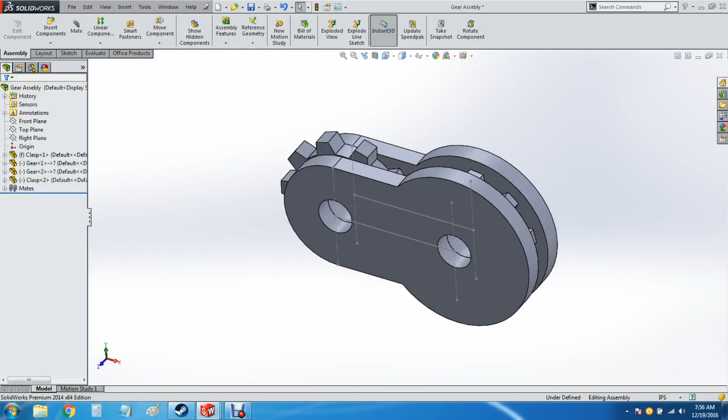Today I'm going to be showing you how to make a drawing in Solidworks as well as a bill of materials. So I'm going to pull up my recent project, one of the fidget toys. It's a couple of gears inside of a clasp. One moment while I work on that. Alright, as you can see, this is my assembly. We've got two components in terms of the two drawing files that have been put together, so I've got the outside clasp as well as two inside gears that rotate against each other.

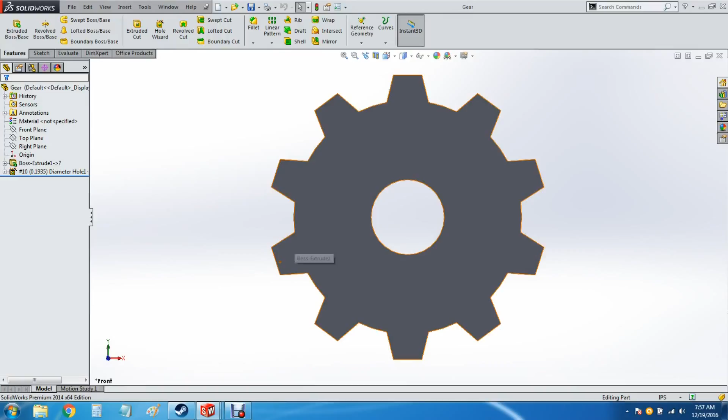Let me go ahead and just put this in. What we have here, this is the gear, and that's the clasp. So I'm going to show you guys how to make a drawing from the assembly, and then we'll make a drawing from the part file.

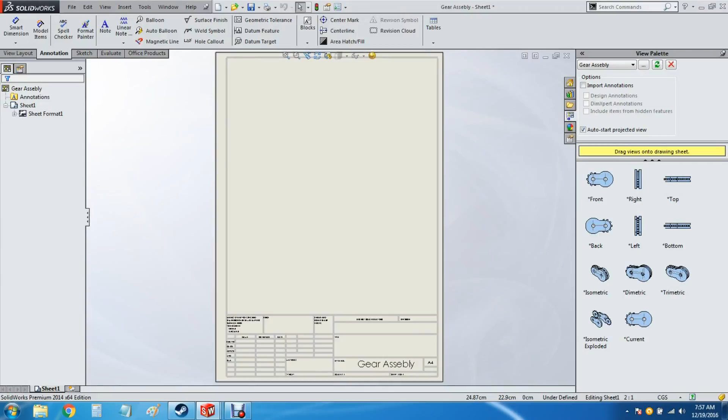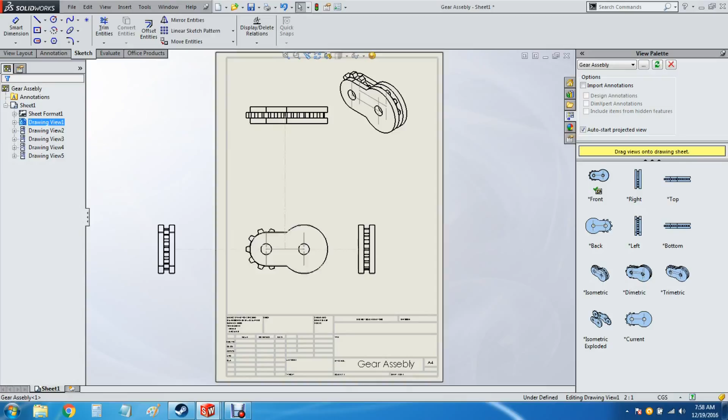So you'll hit File, New, or Make Drawing from Assembly. Do a metric drawing since all my parts are in metric, as my printer prints metrically. You'll push this to pin it down. We want to do the front, I think that'll be the top, and the bottom look the same, so we'll do a left or right. We'll actually have to do both since they look a little bit different, as well as an isometric part. And you'll just hit the check mark and you're good to go.

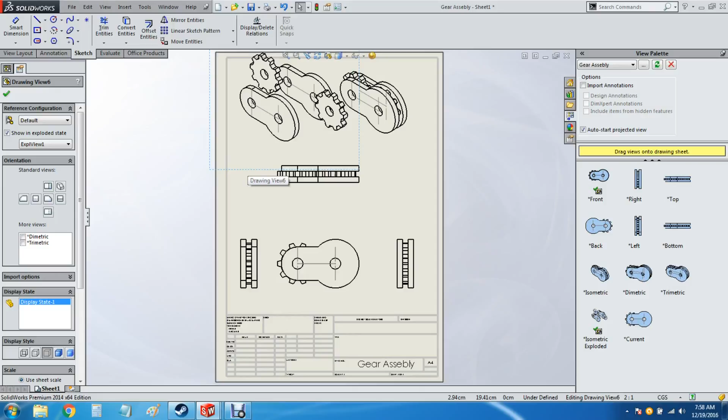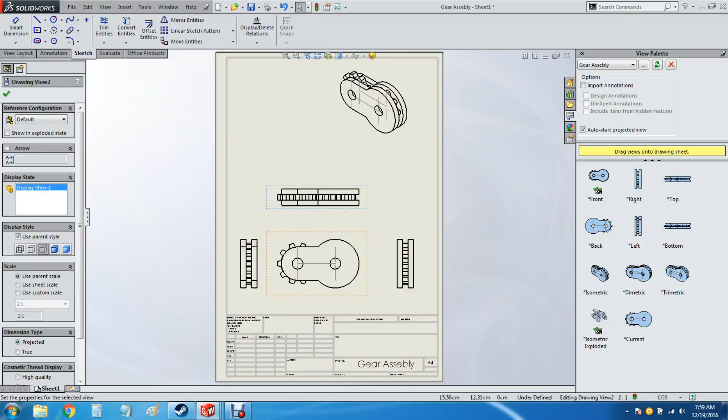So let's go ahead and just kind of put these things so they fit well into my paper. And I also have an isometric exploded view right there. Let's see if I can move that down a bit. Well, it doesn't appear so, so maybe I'll do the isometric view in another drawing. So I'm just going to delete that. Fantastic.

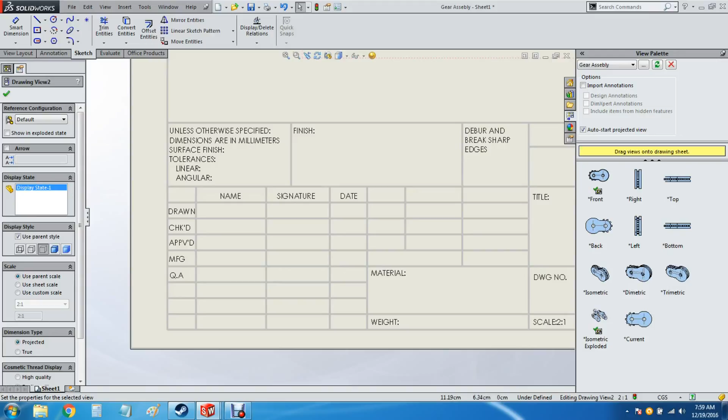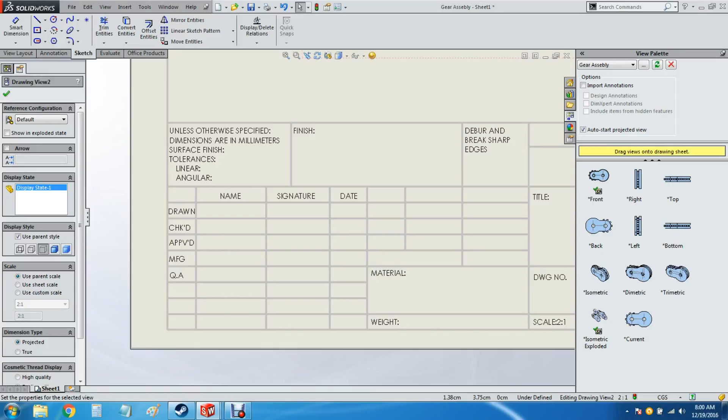The weight, which can be calculated in a different system, and I'll probably make a video about that later. The finish would be, there is no finish. This says deburr and break sharp edges. That really applies to when you're doing CNC machining on metal. Metal can be very sharp, and this would say to make it less so.

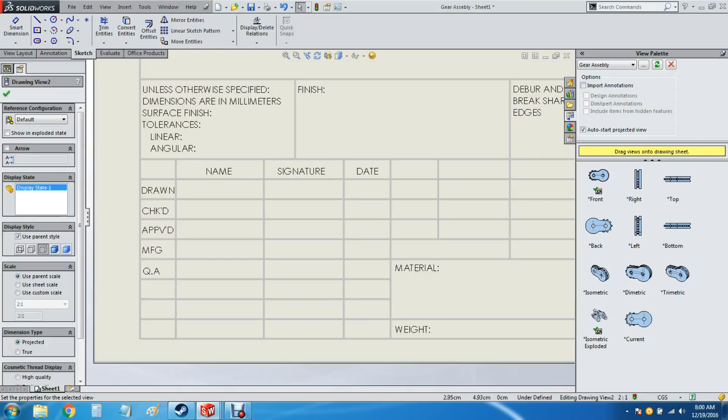And then you've got, if you were doing construction work as an engineer, you'd probably know this: the drawn would be by whoever drew it, whoever checked it, approved it, and the quality assurance I assume. I do not recall what MFG stands for, probably because I'm not in engineering courses.

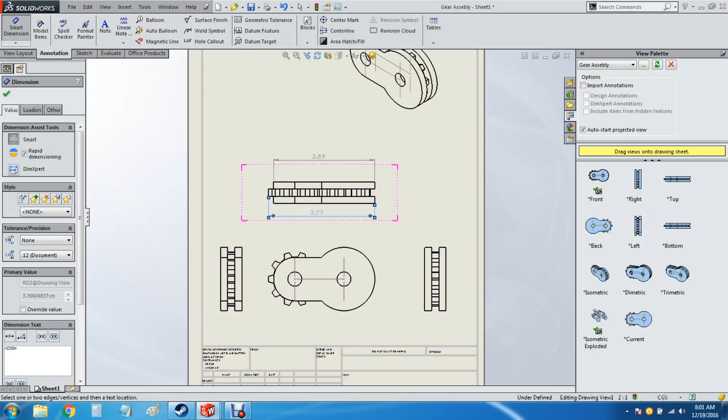And then it says, unless otherwise specified, dimensions are in millimeters. I'm going to change this to centimeters because everything that I draw is in centimeters. Tolerances are how exact it has to be, so you can be like plus or minus 2 or 3 millimeters, meaning there's a bit of wiggle room, which obviously you wouldn't want on something like an artificial heart, but on these things it's okay.

So in a drawing you want to have the dimensions laid out. We're going to hit annotation, smart dimension, and we're just going to dimension a couple of different things.

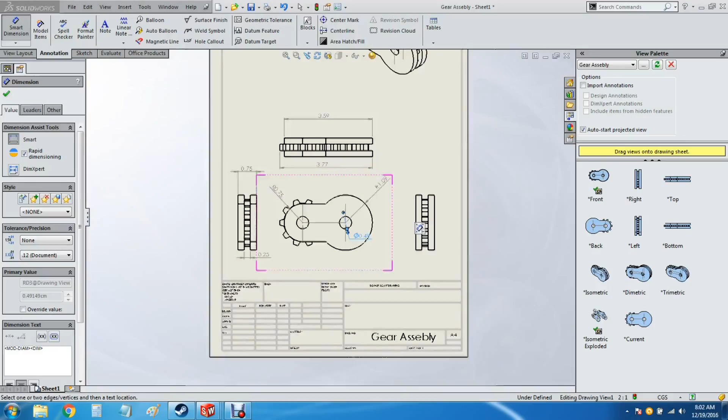So we'll do the dimension of a clasp, the overall length from one end to the other. We'll do the width of the fidgeting toy from one edge to the other on the side.

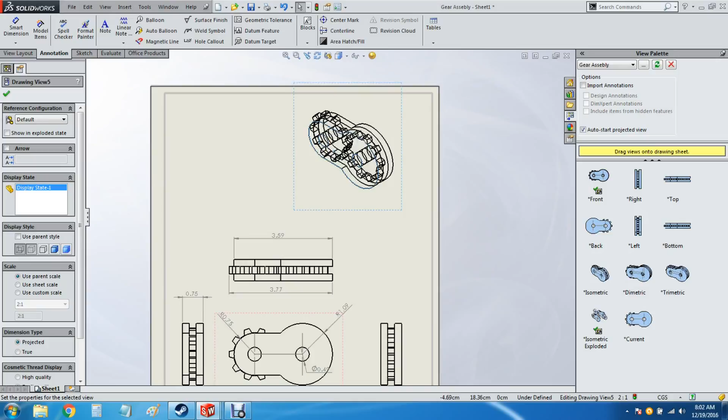You can also, if you want, do the inside dimensions. Let's zoom in a bit. And that line. And you can always drag these things out if you need a bit of room.

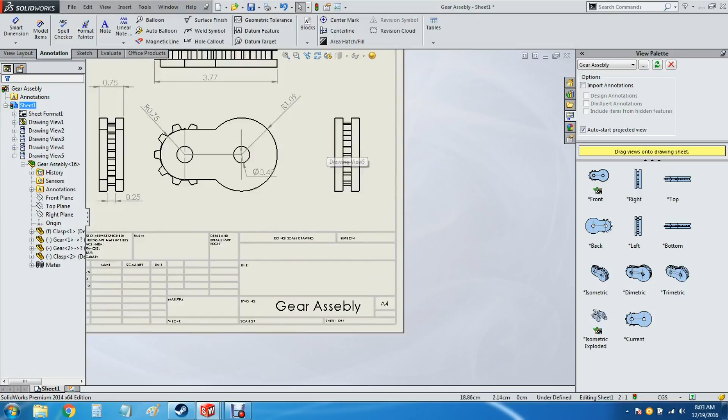Let's see, we'll want the radius of that as well as the radius of that. So we've got the big circle, the smaller circle, and then the radius of my inside holes.

If you right click, you can hide the lines. I'd have to go in and try it again. And this just makes it look a little bit cleaner.

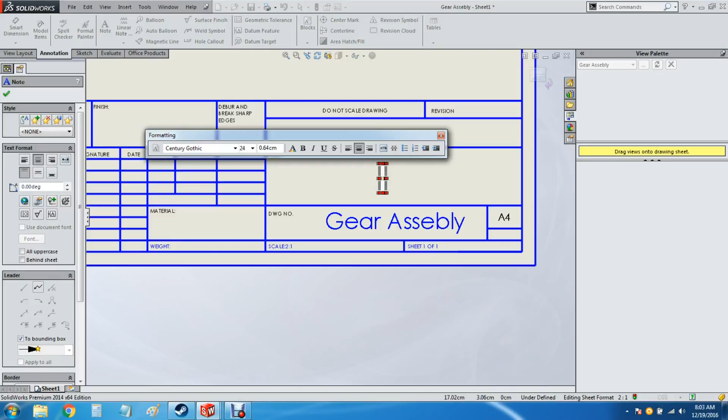If you click on the actual drawing, you can use the display style. So we've got, it's kind of like a wireframe, hidden lines removed, shaded with edges, and then shaded without edges, as well as the high quality.

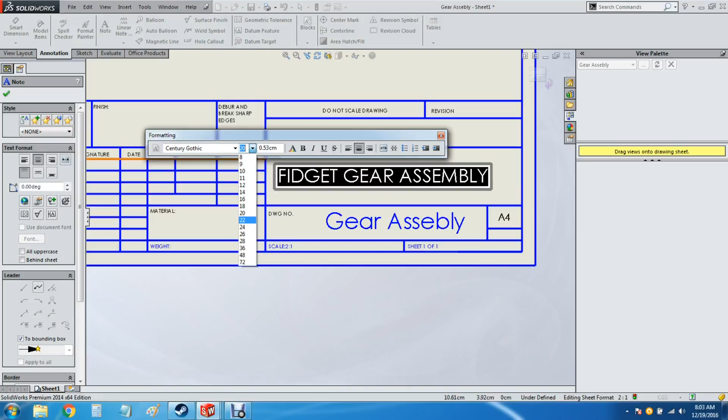And so I can actually print it looking like this. And that's really it for the main assembly. I can scale this to be a little bit bigger if I want.

So if you want to edit any of this information, you'll right click, hit edit sheet format, and then your drawing disappears, but all your stuff shows here.

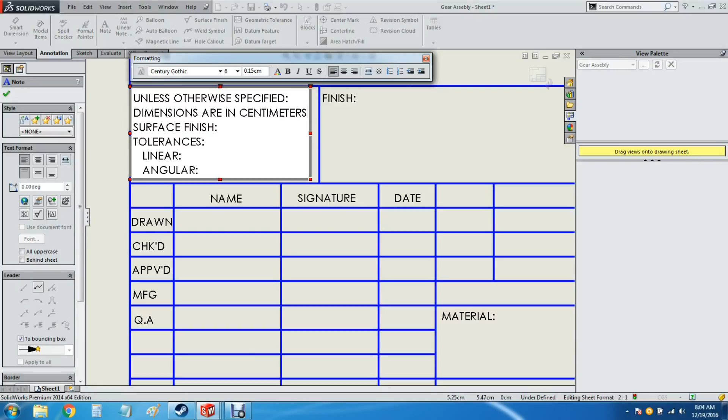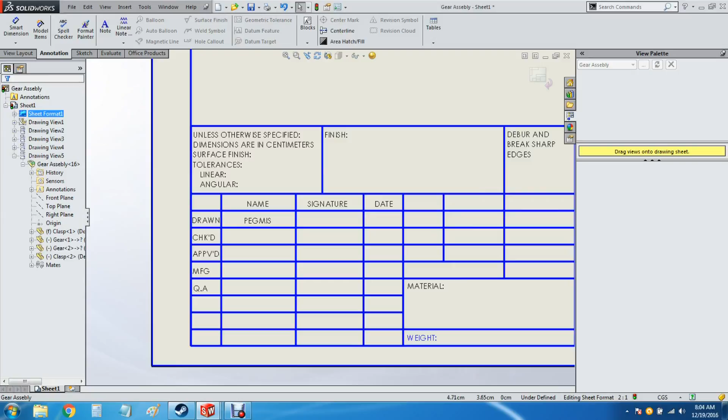So I'm going to find the A, which is where you can type, double click. I'll press on the caps lock to turn on the caps. And I'm going to call this, let's say, fidget gear. Cap locks is on, so I don't need to press shift anywhere. FID.

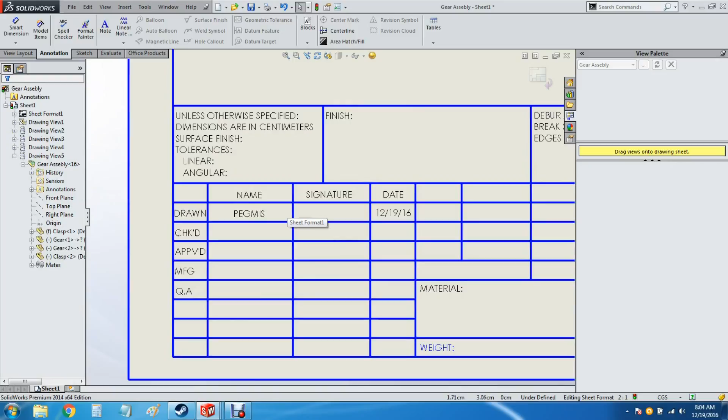Fidget gear assembly, that's a little bit too big for everything, so Control A. We'll just drop this down to 20. 22 fits alright. And then you can just drag it where you need it.

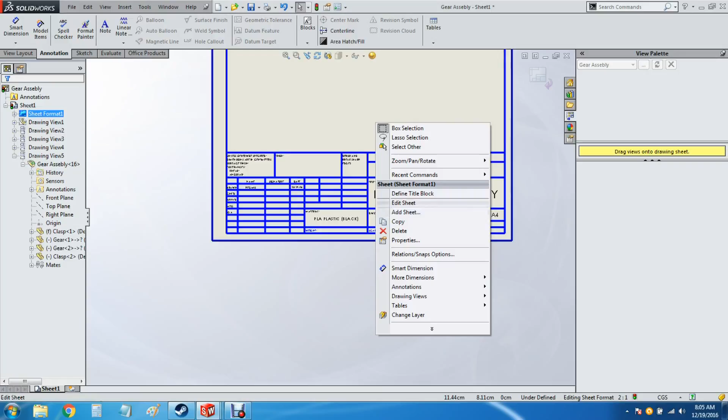Let's see, we're going to do sheet, we'll do 3, so we're going to do 1 of 3. Unless otherwise specified, all dimensions are in, I'm assuming I'm spelling centimeters correctly. Finish none, this is drawn by me.

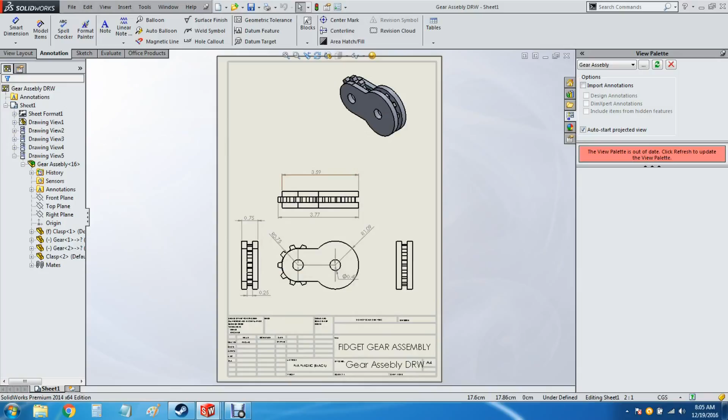If this is an actual drawing, I use my name. It's YouTube, so Pegmis. Signature.

Let's see if I can change that font a little bit. Let's see if I can find the... Oh, it's in there somewhere. And today's date, which is 12/19/16.

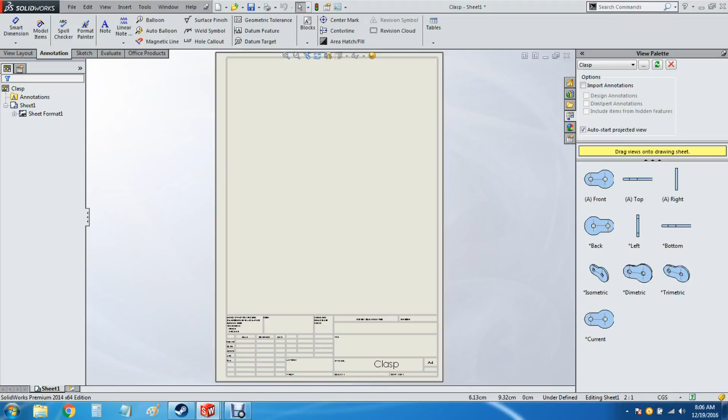Nobody checked it, obviously. Where's my materials? There it is. Material is PLA plastic, black.

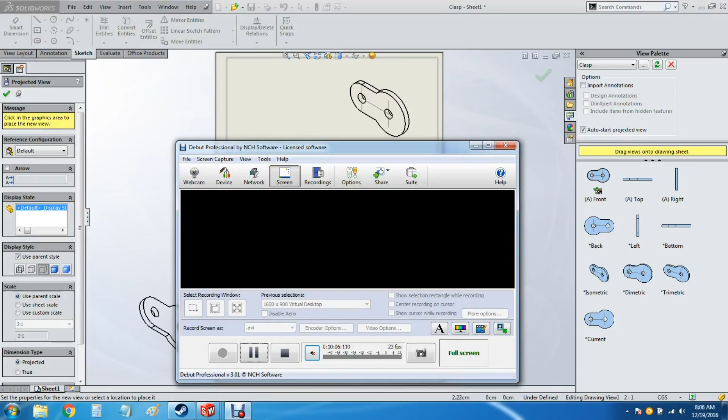And edit sheet. Shows everything. We'll hit F to make it full. And that would be the first sheet.

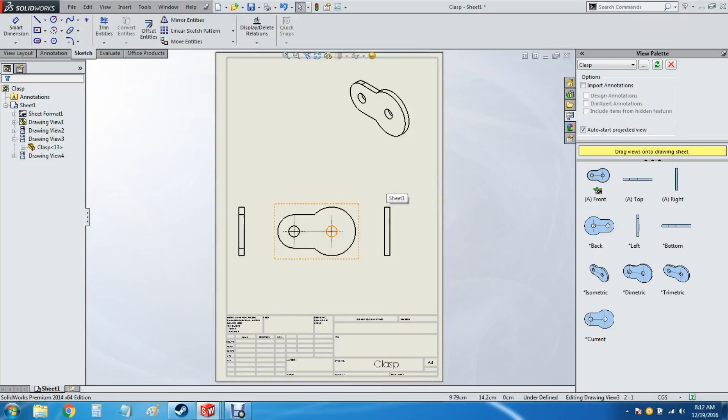So I'm going to just create Control S to save it. And we'll put gear assembly DRW for drawing. And then hit save.

We'll rebuild the document. I'm not going to do a third drawing of the gears for the sake of this video to try to keep it a little bit shorter. But I will upload all of these plans to the Thingiverse website, which I'll put down in the description for the link, if anybody wants to download and print their own.